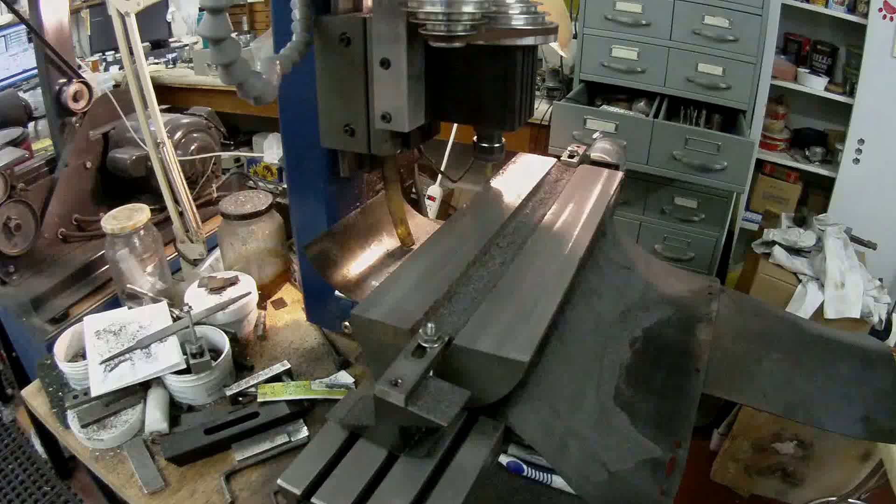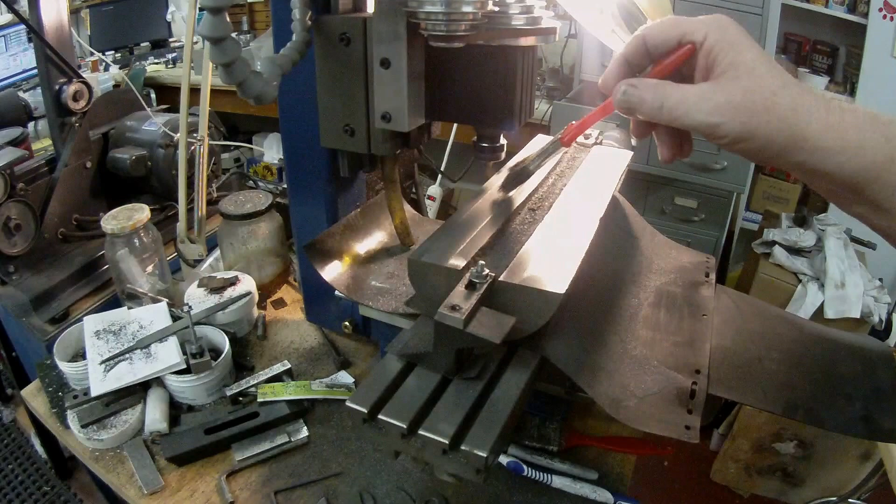I've just started machining the front edge square to this face, or at 90 to this face, so I'm side milling. I've got a 1/4 inch end mill in there, carbide, and because this unit is just sitting on the rough casting, there's no flat surface at the bottom, so it's able to rock if you put too heavy a cut on.

So all I'm doing is I'm taking a 10th cut, a face cut, and I've got to go down until I clean up the material on this face to a depth of at least just over 3/4 of an inch. So I'm doing it in stages. I guess I'm taking a cut with a depth of about 1/2 inch. Yeah, about 1/2 inch.

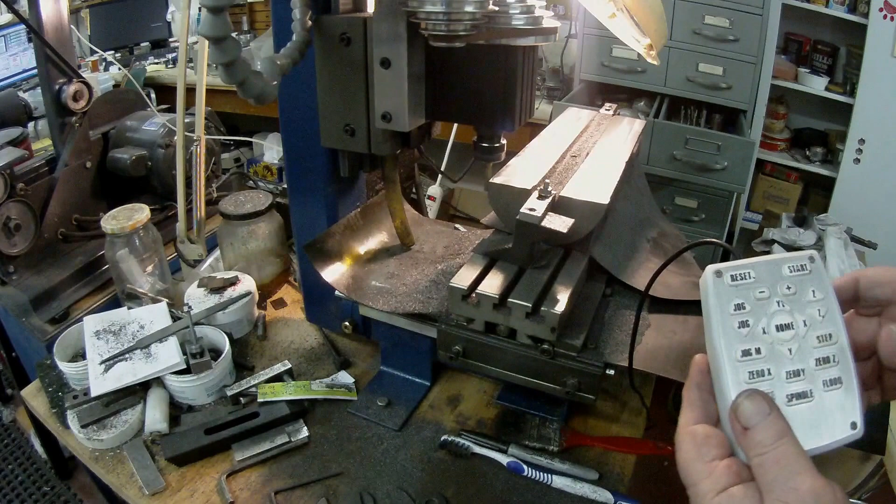So it goes down and then it comes back on the same pass, and then it stops at this end again. Then I just put another 10th on until I figure that I'm going to clean up that face to a depth of at least 3/4 of an inch to 0.8, and I'll get the drawing.

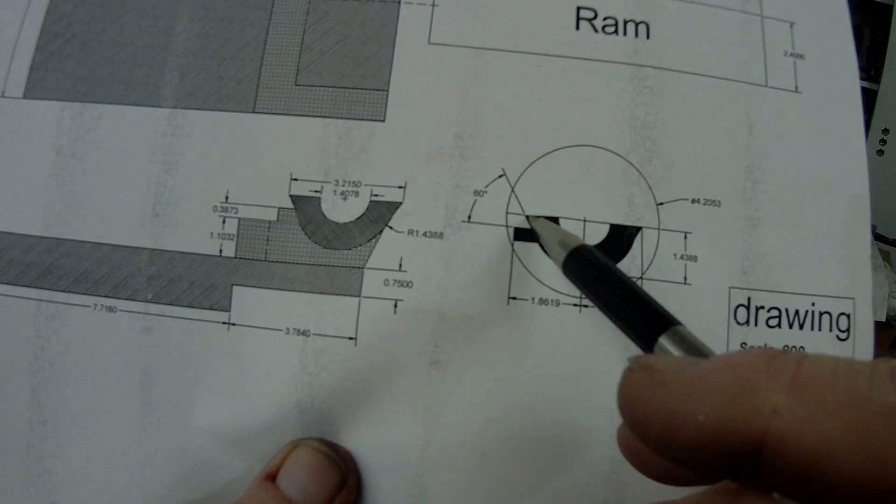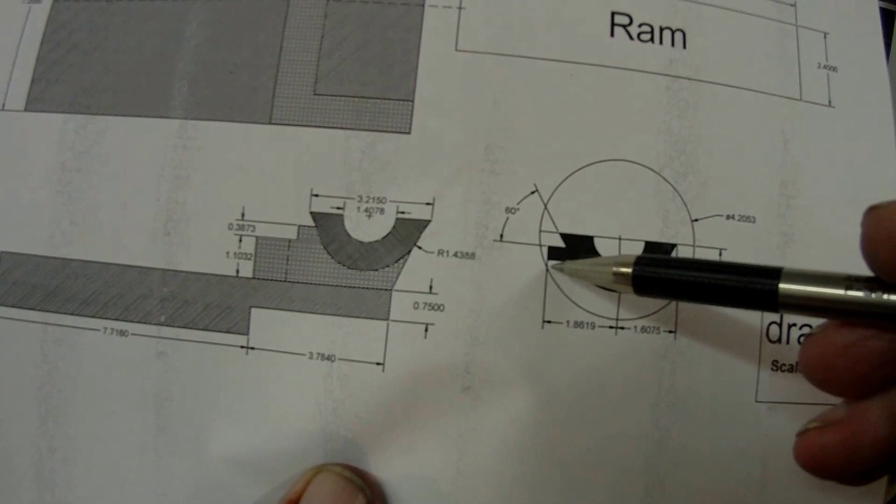Yeah, that will allow me, see what I'm doing now is I'm doing this face down here. Okay, that's like an extension from the casting. That's the 60-degree angle for the slide that runs along, and there's this ledge that comes out, and so the total depth from the top there down to there, underneath there, is 0.750, I think it is, something like that.

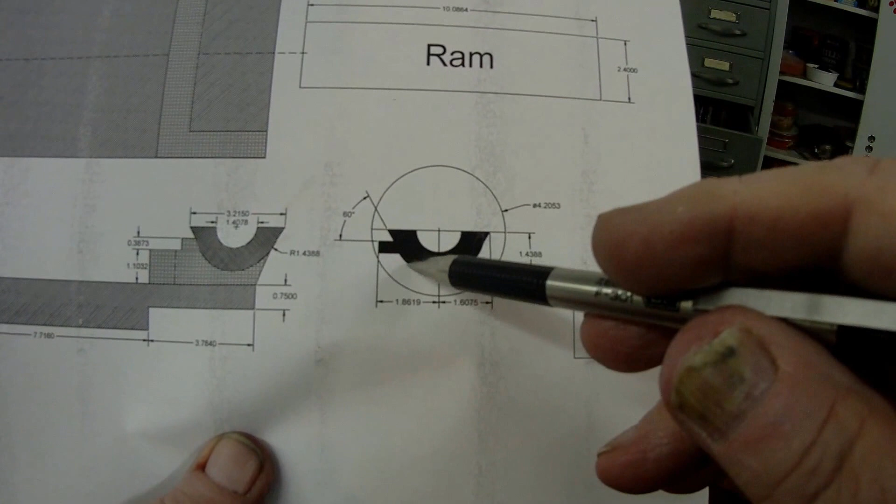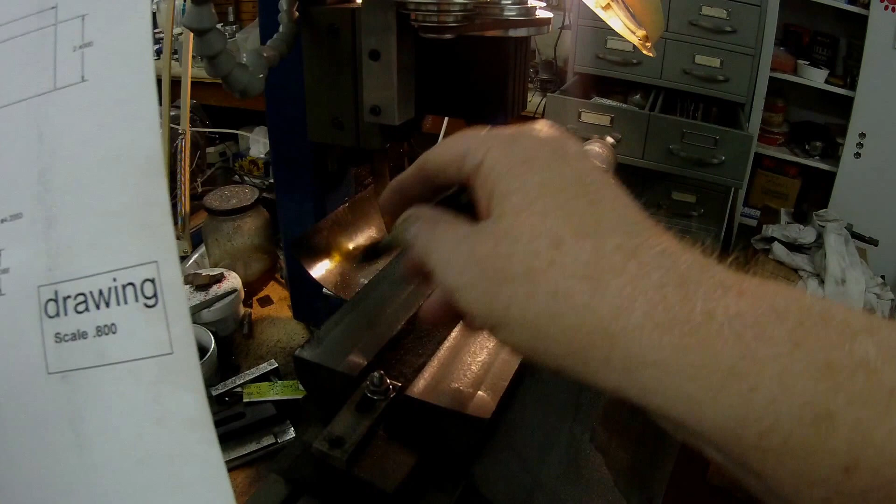So I've got to go deeper than that, and then I'll be able to mill this out here, this radius. So that's what I'm doing at the moment, and that also gives me a datum. What I can do is once I've got this face finished, I can then release this, put an angle plate and rest this face down on the table, and then I can mill this edge here.

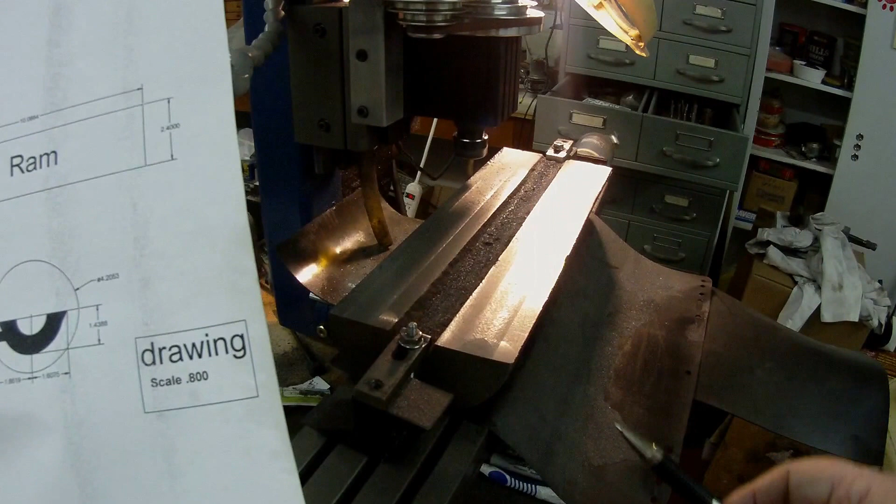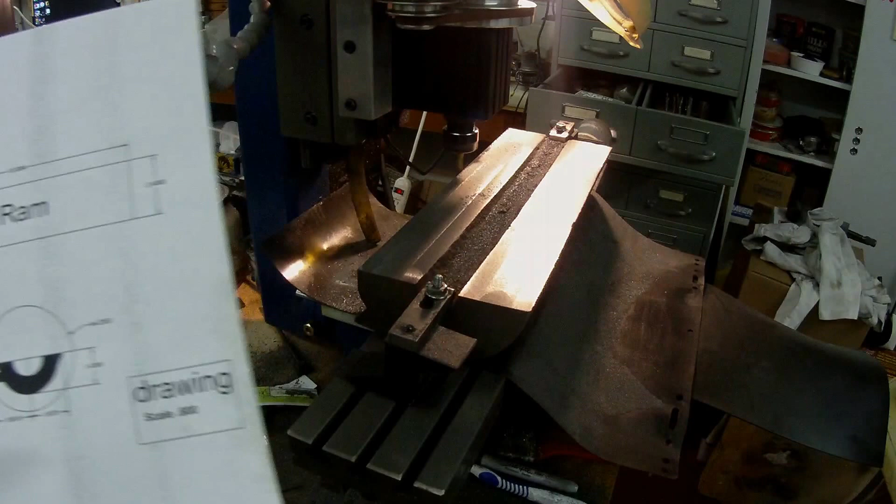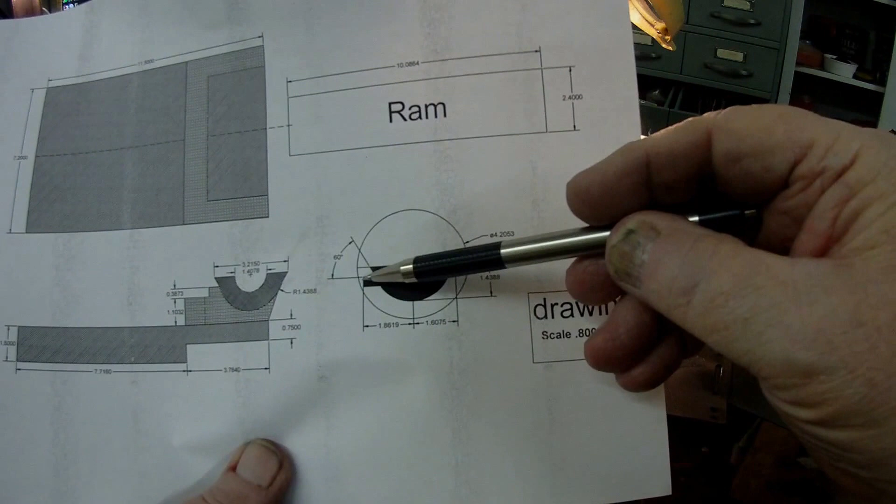It's not very straight along here. At this end the metal curves out, so it will cut better when I'm cutting in that direction rather than the way that's going there. Yeah, okay, what I might do is carefully, once I've got this face deep enough, I can then remove the metal from the top face down to that level, and also in this way to the front face of the dovetail. So then I can finish that off.

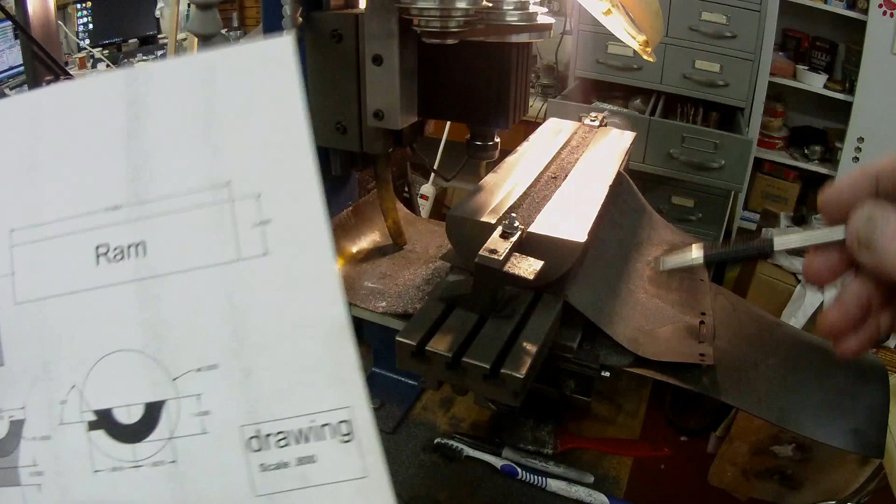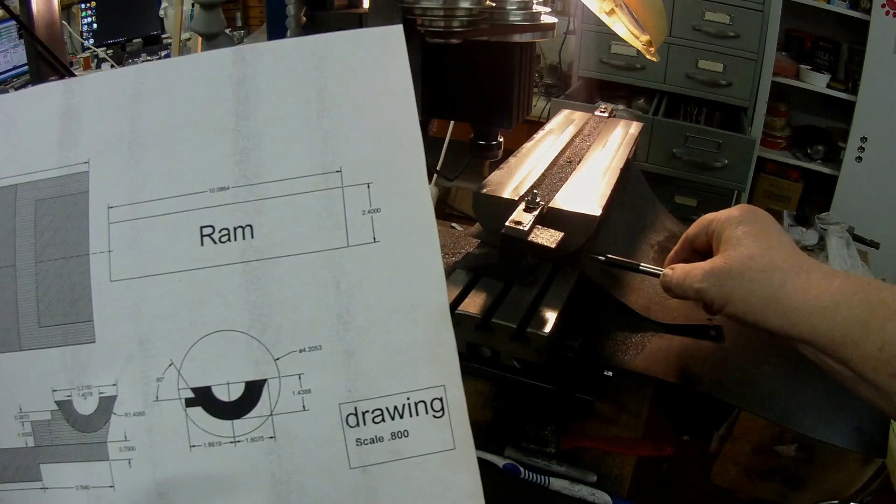I'll probably leave some material on there for final finishing, but I need to get this thing all squared up, and also to turn this over, lay this on the table and machine a flat on this part down here, so that when I place this, if I need to, it will be on a flat surface, and it will be a better clamping arrangement.

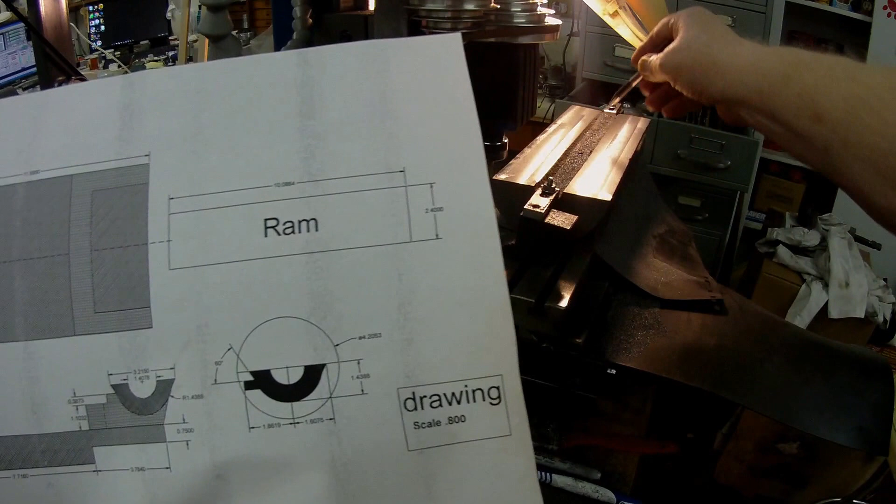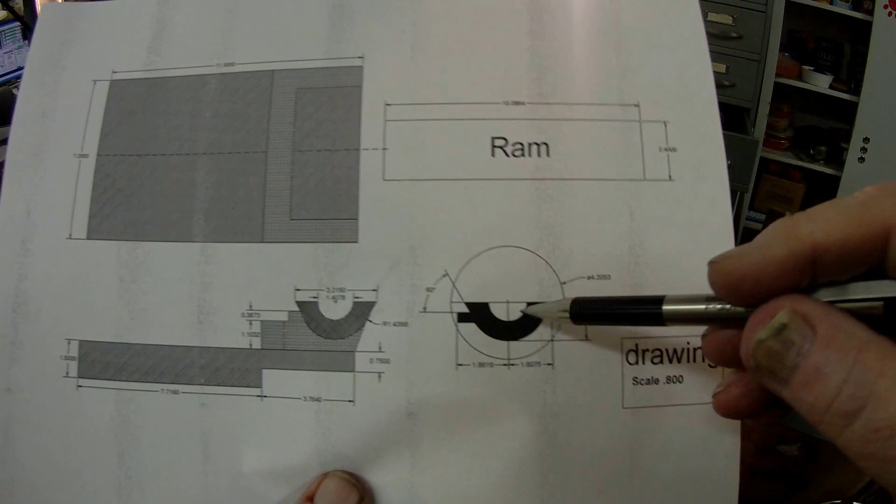What I may do as well before I attempt this edge is to just clean up in here, because I've got to do a CNC cut down. It's not going to be a circle, it's going to go down at a slight angle on each side, and then just a small radius at the bottom. That's how the original is. So that's not going to be a half a circle in there. It's going to be deeper, and it's going to be angled sides and then a radius at the bottom.

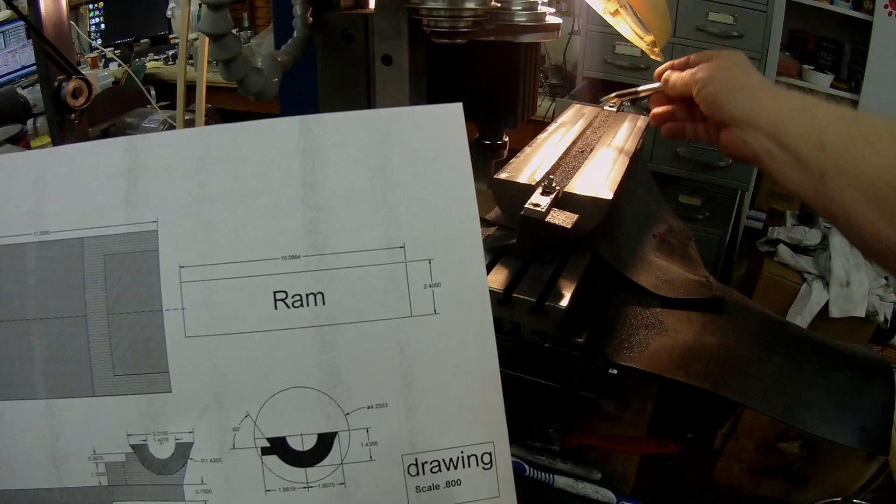So I might just clean up to just a narrow depth all the way along there when I find my center. So hope you can understand all that. You'll see as I go along, I guess. It will become plainer. Okay, I'm going to put another cut on.

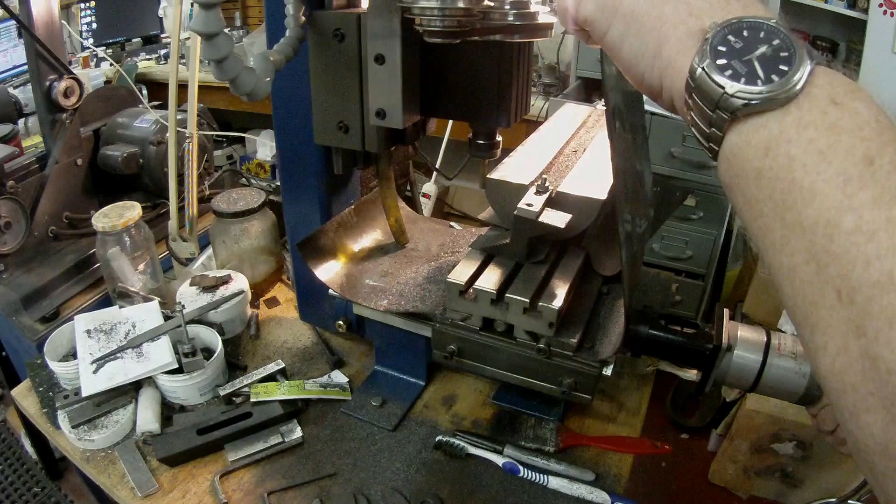The reason that I'm cutting into the metal is that this is so long that I've got it situated where the plate on this end comes very close to the outside carriage of the y-axis, and I don't want it to jam, so I haven't got much space for clearance. So that's one of the reasons why I'm not going past the surface before I put a cut on. Okay. It's only 10 thou, I know, but it moves the metal, and it's safe at that stage.

You know, if you've got a flimsy setup, it's not advisable to work to the calculations that you get for speed and feed and cut. I guess you've got to do it freelance and listen to what's happening, and maybe I could take a bigger cut, but the trouble is that this is just sitting on the base of that old casting. If you look around here, you'll see the other half of the casting, and as you can see, it's pretty damn rough. It's all scale and nothing's flat or anything, so I have to be careful.

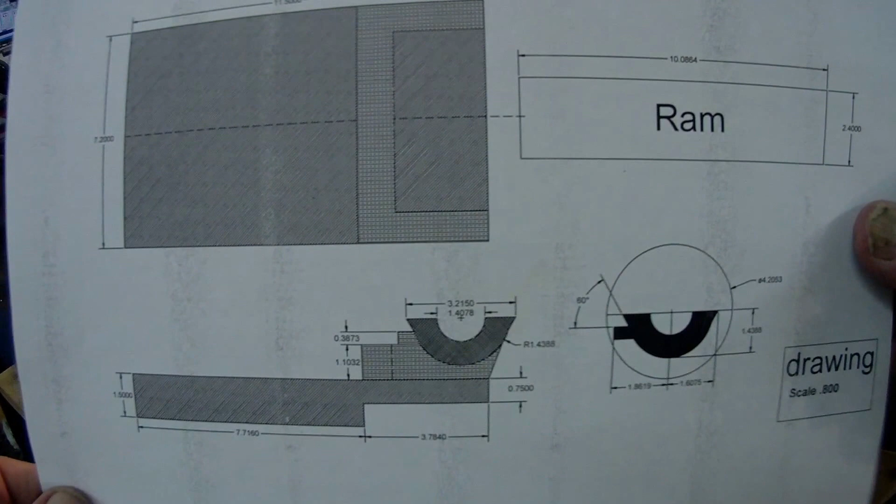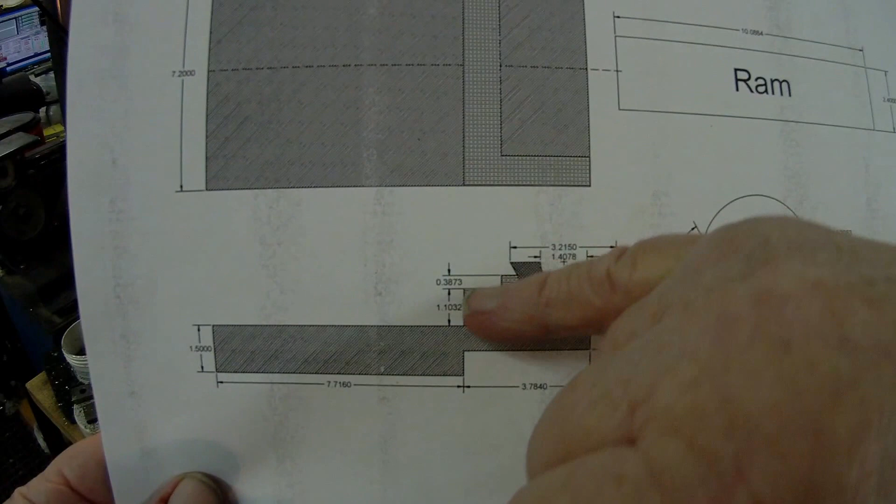That's more or less what I'm working to, that drawing. Of course I can blow everything up when I'm on the computer, so although it's small on the paper, yeah, this on the original is all one casting, the whole lot there. So I'm going to have to make it in two, so I'm going to have to get another block, and it'll only be about 1 inch wide.

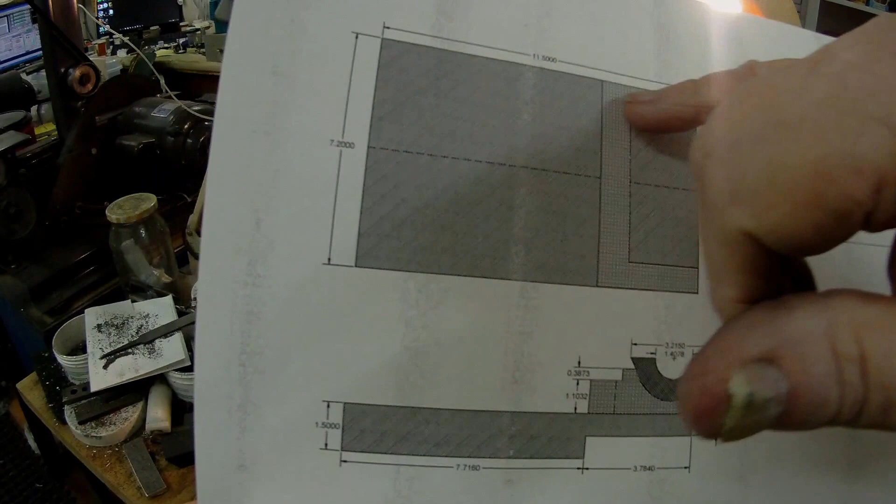And I'll have to position it so that I can put the radius in there, which I can do with my y-axis and a radius on the x and y, and that way I can make up blocks and probably screw down or screw up into it, and that will be these two pieces here. And then of course there'll be another bar 1 inch wide, I think 1 inch high, that I can just attach to the ends, and that will finish the whole thing off there.

So I'll switch the camera off at the end of this run, just to give you an idea of the progress, and see how I'm doing it. Notice that the last couple of videos that I took, the short ones in machining this, I held by hand and it was very shaky, so I'm going to try and resist doing that in future.